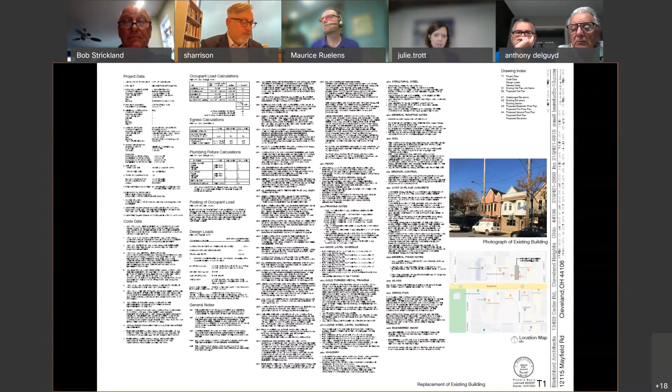Is there anyone else here to speak on behalf of the project? Okay. Well, since we're having trouble connecting the applicant for case one, I cannot see him up on the screen. If you are okay with us moving on to our second case until we can troubleshoot what's going on with your mics, we can come back to you as soon as we can get everything working. Is everyone okay with that? Mr. Logston, I can see you on the screen now.

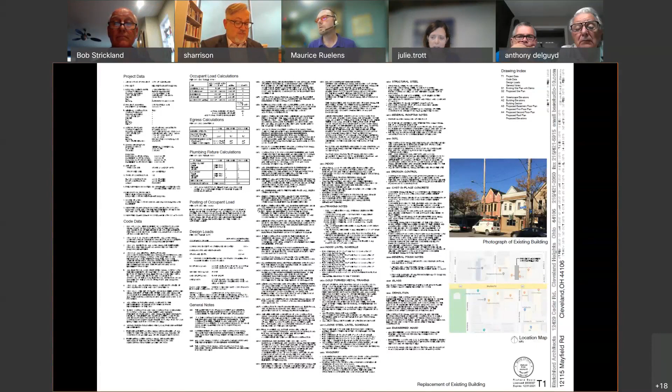We'll move on to the second applicant and we'll come back to you once we can get the mic situation fixed. We'll move on to our second applicant, located at 12002 Mayfield Road, the installation of Rocky Colavito sculpture.

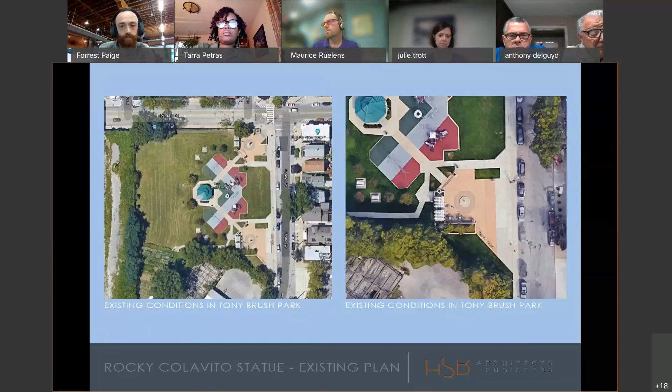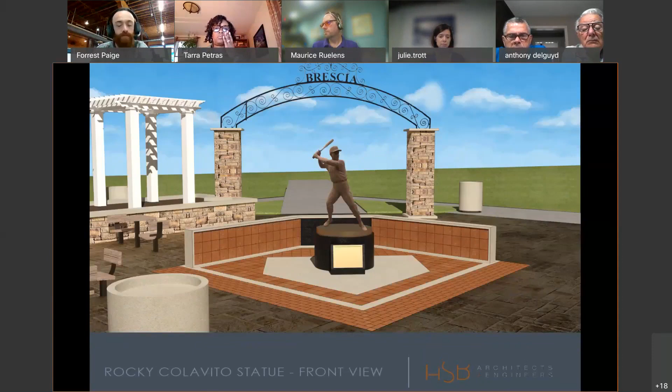Here's just a couple other views of that area, and here you can see what our proposed orientation would look like. The inspiration for the layout is a baseball diamond, with home plate being the central concrete piece where the statue sits on top. You can see how it sits in that same octagonal area that exists right now.

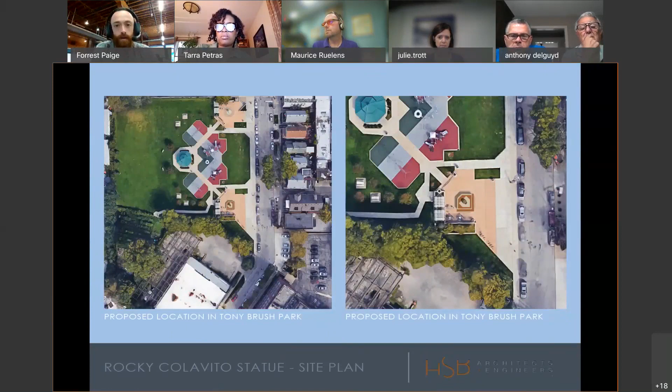Here's a more final rendition of what it would look like sitting in the park. You can see the low sitting wall behind it. Those black marble pieces right behind the statue are plaques for larger donors, and all of the other bricks surrounding the base and in the wall would be for donors contributing to the project.

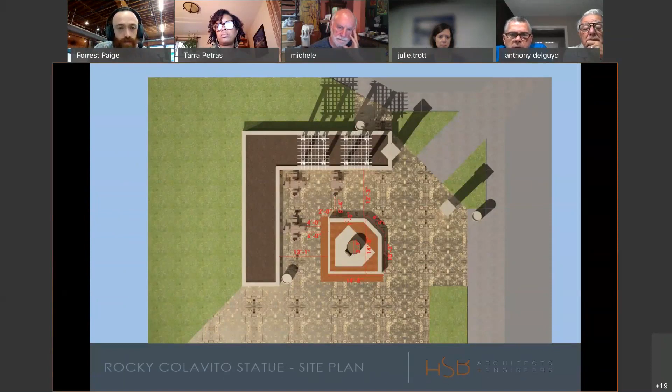Here's another view so you can see how the statue is elevated on that platform, two feet high, with a plaque set into the front that has information about Rocky Colavito for people to read as they're admiring the statue. Here's another view, and here are some dimensions showing clearances between existing benches and everything, so it's nice and easy to move around the statue and the wall without impeding movement throughout that public square area.

And here you can see the wall itself is the same height as the existing wall surrounding that planter bed back there, so it's very community friendly—you can sit on it. It's not obstructing the view of the park because it's all the same height, so it just matches the same aesthetics already in the park.

And yeah, that's a final view of kind of a superimposition of what it would look like seated in the park as it is now.

If Mr. Gamatees, you'd want to expand on anything else that I might have missed? Well, the objection that the committee had, the Little Italy Development Committee, was the color of the bricks. They want the red pavers for the basic floor foundation, but the wall bricks they want more compatible to the other wall behind it. I have contacted the fundraiser brick company.

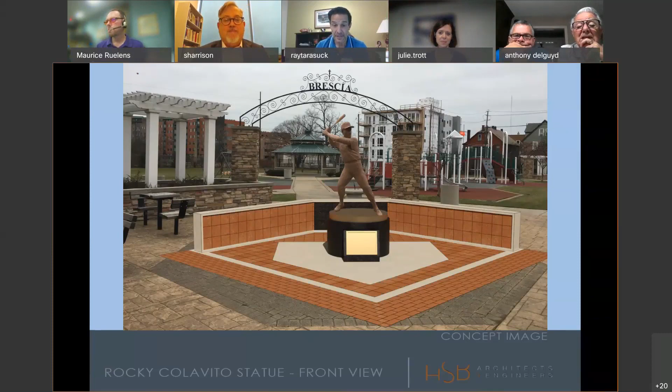I have a comment to make, not about the project itself, but it's going to sound silly, but the bricks and the donations for the bricks themselves. Years ago, when the Indians did Heritage Park, they did the same type of campaign on the donation for the bricks. And one of the really neat things that they did, I would suggest, and I don't know if you have plans for this or not, but as a suggestion, one of the neat things that they did was in donating for a brick there in the park, they also gave the person making the donation the opportunity to receive one of those particular bricks as a souvenir, as a memento, and the opportunity to purchase additional ones.

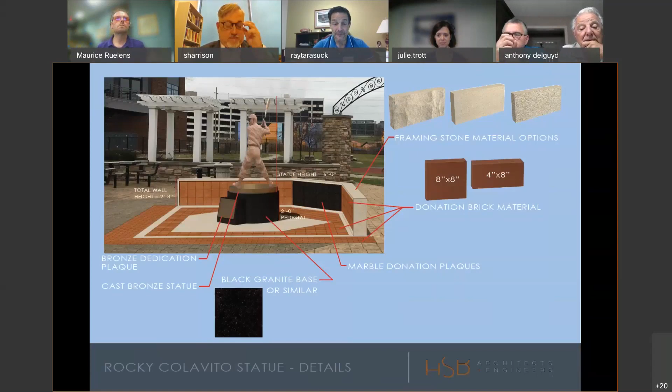And we did that with our family. We have a family brick that's there. Got a couple additional extra ones that have been a really kind of cool souvenir, baseball legacy that's been able to pass down to my nephews, that when they were little, they went and saw their name on their brick at that wall, and they were able to have one exactly the same at home to connect it. It's just kind of a cool souvenir type legacy that we've been able to pass down from my dad to those boys. So as a suggestion, I would make that suggestion to consider whoever does donate, that they might be able to receive a replica to keep in their home or pass down as a souvenir. So that's my only comment. But I think it's a terrific project.

Well, these bricks that are donated are there for perpetuity. And that's the whole point. My family's going to have several bricks and plaques because I come from a large family, and they're all waiting to come down and see it. And I think that's one of the points. And you have a good point as far as a memento thing, but this is a fundraiser thing, and that's going to add to the expense of the project.

I will take that into consideration to see how much donations we get. I think part of the problem was that everything's already priced out, and we didn't include anything like that. I mean, it's a great idea. Having known about it in the beginning, maybe that's something we could have thrown in there for another $20 or $30. But it's priced out. It's not priced for that.

Now, at the end of the day, if we get a ton of donations, maybe anonymous donations or whatever the case may be, maybe that's something we can introduce. Well, we also have structured into the project that anything over and above the cost of this project is going to go into a scholarship fund under Rocky Colavito's name. Now, if there's a lot of money left over, that's a good thing.

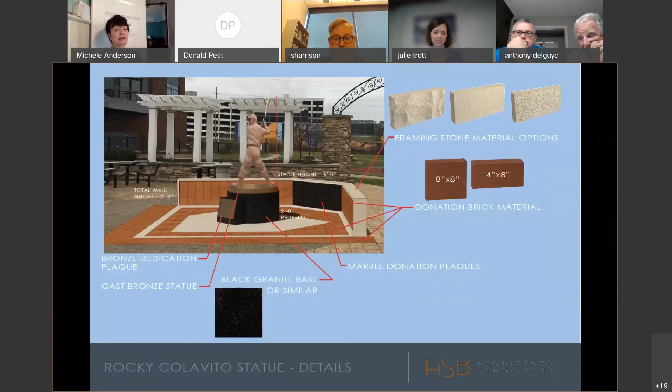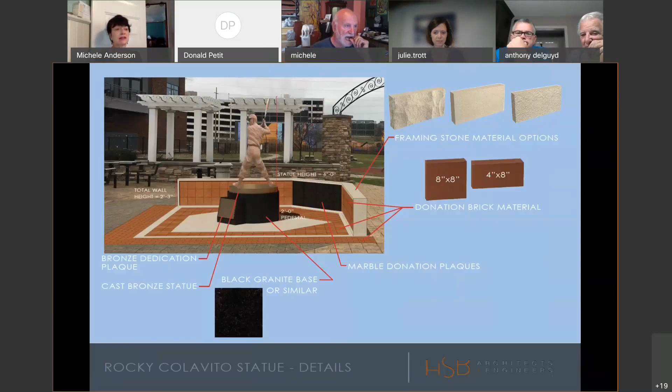Ms. Anderson, yes. Ms. Bailey, yes. Mr. Kalikia, yes. Mr. Collier. Mr. Dryer, yes. Mr. Harrison, yes. Mr. Strickland, yes. Mr. Tarasek, yes. Ms. Trott, yes. The motion passes unanimously.

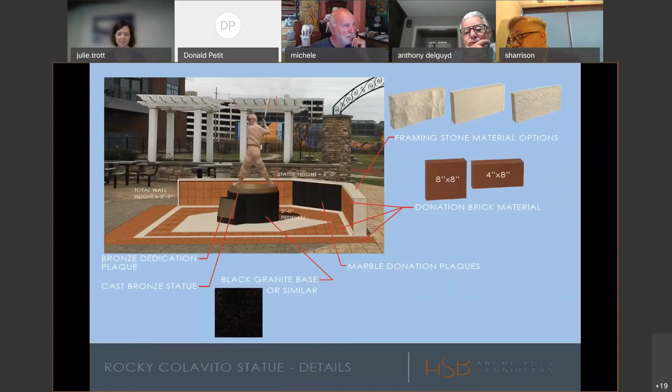Excellent, well, we look forward to seeing your project constructed. When's the timeline to do the installation? Sometime in the spring, we're going to have Rocky come in and have a dedication, hopefully opening day. That would be great, but I don't want to pinpoint exact date. Well, excellent, good luck.

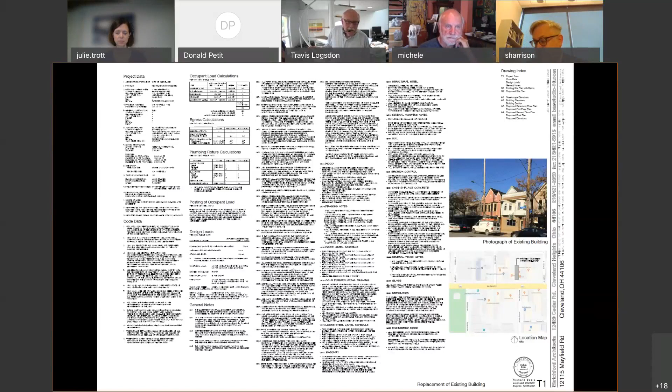The folks that visited with us about a week or so ago had an opportunity to walk through and see the condition of the building. Unfortunately, there really isn't a great opportunity to try and save the building because it's in really bad shape. So his initial goal was he had spent enough time looking at the building and felt that he really needed to replace it, because his desire as a new program is to have another restaurant in this location with a party room above. So that's his main goal right now.

And he's done really well. He has a similar setup at Maxi right now with the restaurant on the first floor and a party room up above. And he's always booked for events and feels that there's an opportunity to make a good go at this same kind of situation. It would be a slightly different restaurant, it wouldn't be the same kind of foods and stuff.

On T1 here, you can see that's the existing building that's there, which will be removed. Now, we did talk about the possibility of saving some of the tin ceiling in the front area only. There's an old original tin ceiling. We don't know what kind of condition it will be in as we remove it, but the possibility is there of taking that down and possibly using it over the new bar or even in the two restroom spaces on the first floor.

So we're going to have to very carefully take the building apart, almost like dismantling it, and protect the two other buildings on the side, and take everything out the back.

So there's an alleyway that is accessible to all of the stores along this side and restaurants, and then there's a parking area. So we have some flexibility of getting trucks and stuff in there to pull things out and then take them away. But it will be a slow, careful process, so we don't do any damage to anyone.

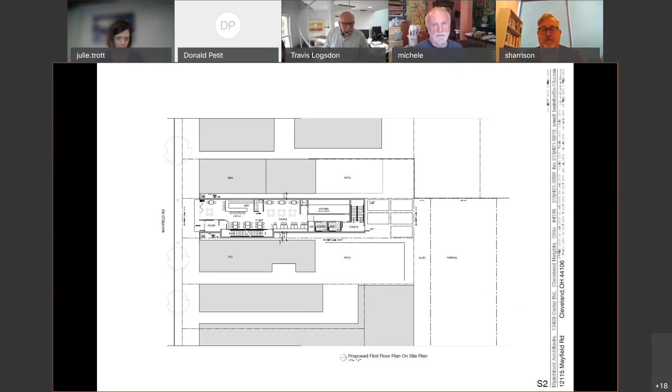And you come in, there's a small dining area, a bar, and then a couple of different dining clusters, we'll call them. The two restrooms are in the back. There's a janitor's closet, and the kitchen, which is a little bit larger than the one at Maxi right now. There's a stairway along the side, and then there's also a stairway at the back.

We need two exits for both the second floor and for exiting from the basement. In the basement, there will be a prep room, a small office, and then the food storage and all that down there.

So the brick we're working with is similar to the brick on the high school. We looked around the neighborhood, and there seems to be more red brick, reddish brick, or red tan brick options. We initially did not have a brick option when we went through the Little Italy review board. Actually, when we went through talking with Ray, he suggested that we bring a brick character into the building. So we did. We've been through the Little Italy review process and have been approved.

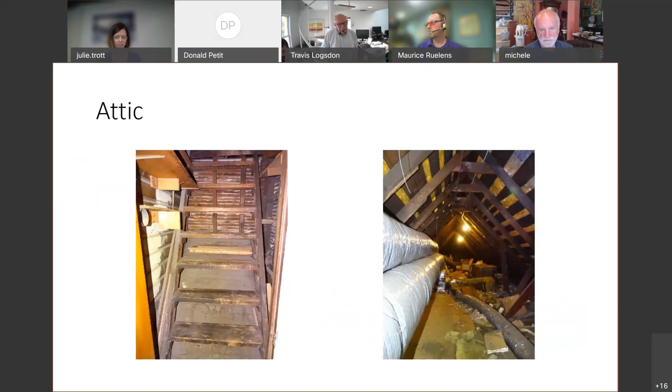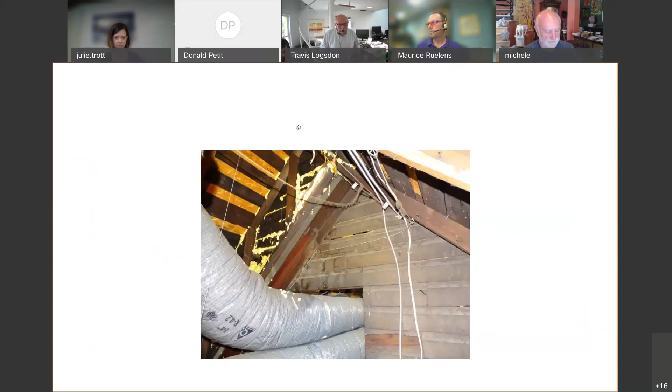And what was the general feeling from the staff related to the building? That it was in poor condition, good condition? It's in poor condition. There's water infiltration, quite a bit of damage, there's flooding or water in the basement. Roof is leaking. It is leaning quite a bit.

It's lost a lot of its character, although it's been more than 50 years since the changes, it doesn't have its original character. I don't know how viable of a fix this would be because there is some sagging in the ceilings in different areas as well. I know Mr. Harrison was there, he could probably speak a little bit to this. And Don, you were also there if you want to put in your notes on this.

Well, it's definitely leaning. There's a real pitch to the floors on the upper stories. In the alley between, posts have been added to prop up the second floor that's leaning there. It's really close to the neighboring building to the east. It's really tough to make a case for restoring this building. I don't think it's architecturally significant. It's been altered. It does contribute to the streetscape, but it seems like the conditions really belie a restoration in this case.

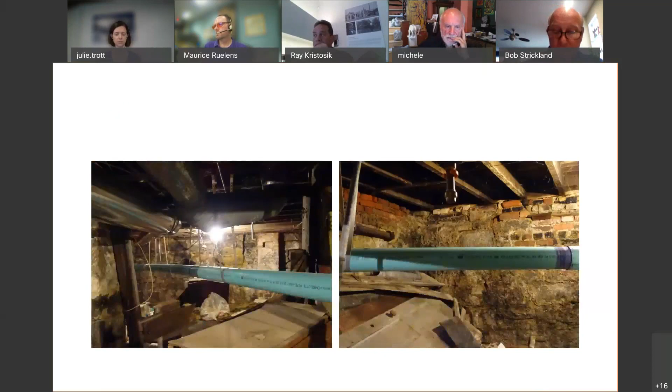Other questions or comments? Madam Chair, we have Mr. Harrison. Go ahead, Mr. Harrison.

You're muted, sir. I'm so sorry. I would echo Commissioner Strickland's comments and his question to Giancarlo - is there a repository that could take these stones, assuming they're in good condition?

Can you hear me? We can now. Okay.

Sandstone, when exposed to moisture for a long period of time - and these foundations are typical of Cleveland - it actually gets very, very soft and sandy. It begins to fall apart. So I'm not sure, I think these are limestone, though. I think these are limestone. Sandstone - this is sandstone. I'm pretty sure it's sandstone. Okay.

Which is sandstone. Even the bridges that we have are sandstone. The largest quarries in the world are right here in Ohio, so it's a very common material historically in Cleveland. But these basements have been exposed to moisture for such a long time, so it would be interesting for a wall or maybe landscaping, but I'm not sure it would be something worth saving, really.

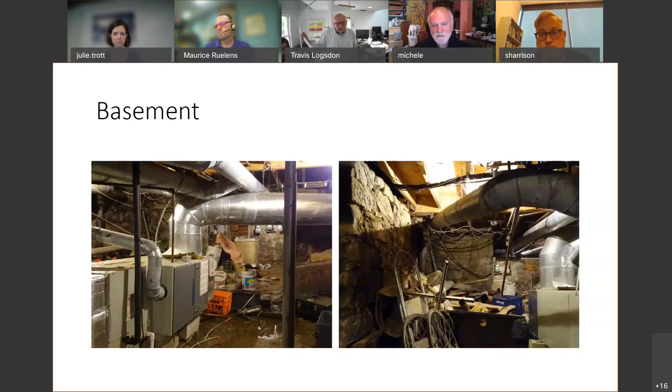Thank you, Giancarlo, for that input. It just looks like such historical stone that I thought maybe there was a convenient repository for reuse of stone of that nature. But if it breaks down over time due to exposure to moisture, then I understand your point.

I believe Mr. Watson had his hand raised next.

This is Rich. We truthfully did not discuss the saving of the stone. I can bring it up with the owner. From his viewpoint, everything that's there except for those few items. There's also a barber pole on the front that will be retained and used somehow, because his wife previously had the La Barberia hair salon there, which has been closed for a while. I think I'll talk to him, but I don't think there was a lot of conversation, frankly, about the saving of the stone, but we can certainly discuss it.

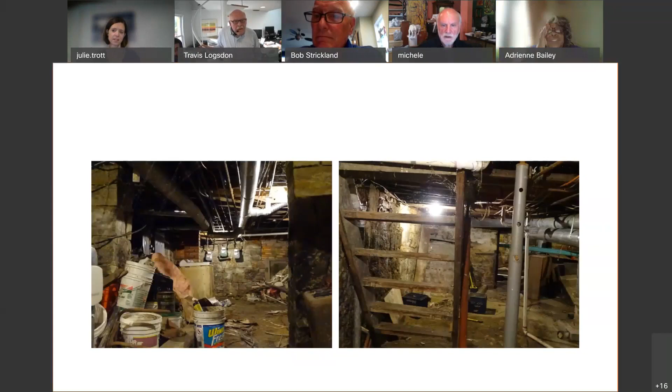Ms. Bailey? Yes, I just have a question for the architect regarding the foundation. I see some bricks in there. Is the actual foundation built with brick and then the stone is just put on the wall as a finish? Do you know that? No, we believe it's stone. There's some brick infill that's been used over time, but the main foundation is stone. It's stone. Okay, all right.

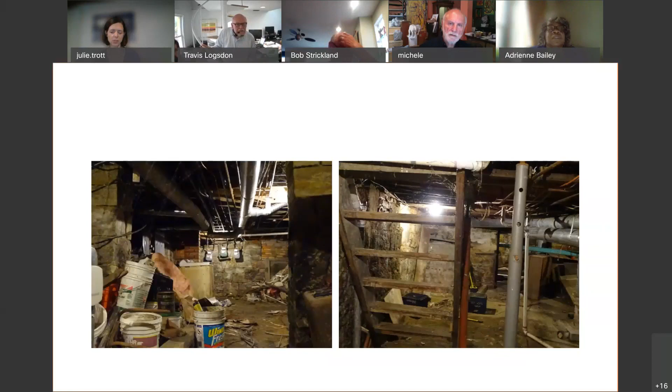My question for logistics here: are we looking at this as a final review for both the demolition and the new proposal, or just the demolition at this time, since this is the first time we're seeing this project?

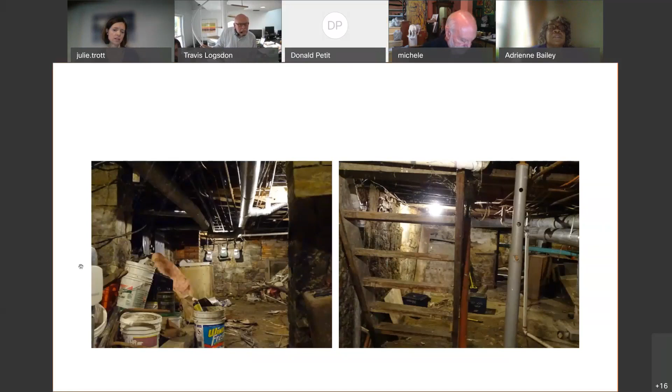Yeah, Madam Chair, this is on the agenda for final action for the demolition and the new construction, but that's always at the discretion of the commission. We felt that because the design review committee had taken this through a process already and approved it, that it could be approved for final action. But if there are outstanding items that you're not seeing or other issues, then I think we always have the option of tabling the new construction.

Okay, perfect. Thank you for clarifying that.

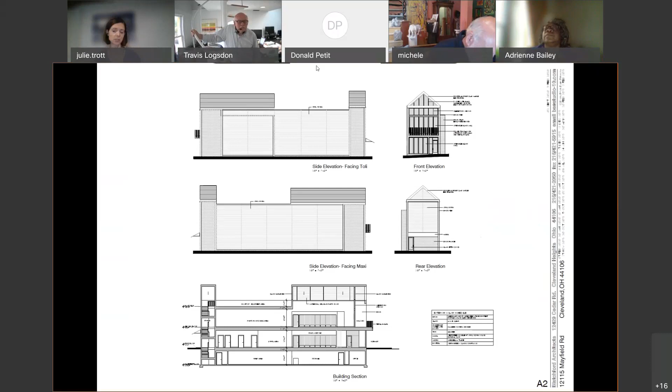Other questions or comments from commission members? Madam Chair, we have Ms. Anderson with her hand raised. Go ahead, Ms. Anderson.

I agree with the demolition. This building does seem to be structurally compromised, and I think it would be just not feasible to try to right the leaning and try to make it usable as it is.

My concern about the building that's going to be replacing it is that it looks like the vast majority of the facade is glass. I can understand that the owner wants as much natural light as possible. It's just that it is so inconsistent with the other structures on the street. The structures on the street have a nice rhythm and pattern to them, not only in size and scale, but in openings as well. I think the original designer probably had this same concern about natural light, and that's probably why they introduced the bay windows. So that's my concern, that I just wanted to bring up.

Okay, thank you. Ms. Bailey? Can we make comment on the new construction now, or are we just still talking about the demolition? No, go ahead. I think we're talking about both.

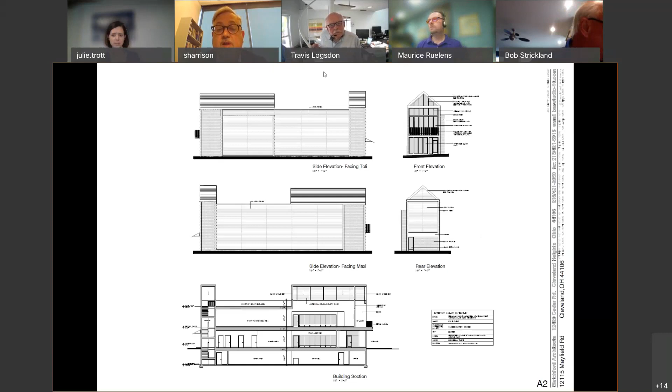Yes, just to quickly answer your question, I've been quite vocal all along about the height. If you lowered it to the level of the two buildings on either side, especially the one to the west, I would support that. I personally don't think the glazing in the tympanum of that gable is necessary or even attractive. But for me, as Chairman Trott said, the height is unfortunately messing with the proportion of the building and the pitch.

And so visually, I think if you lowered it, you'd have a more successful design. So I'm hoping we can vote on the demolition while I'm still here, but I'll have to leave shortly.

So what I'm hearing, though it wasn't exactly said, is that in general we support the direction you are taking it, with the feedback of the height and wanting to see a little bit more detail on materiality and its exact locations. You're trying your best to present it through the screen, but having a close-up of the building with the materials called out so we could understand the railings and colors and so forth would allow us to get to a final approval very quickly.

Okay. So is there other feedback from the commission that is in contradiction of that? Or do you think we could put forward at least a demolition or the tabling of the new concept?

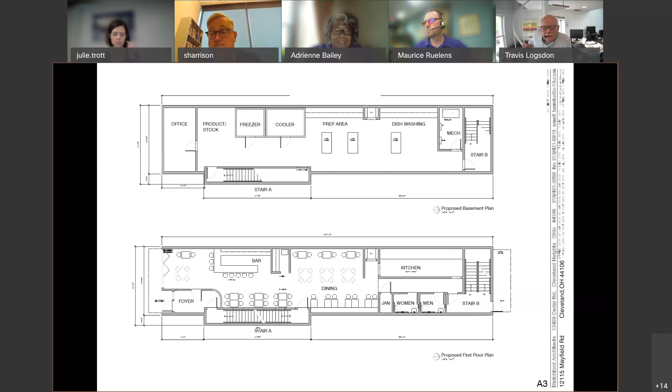Okay, that's the stairs. If you look at that, it's the stairs popping out, so you're seeing the front portion of that. Okay, so that's the stairs. Okay. Yes. All right, go ahead.

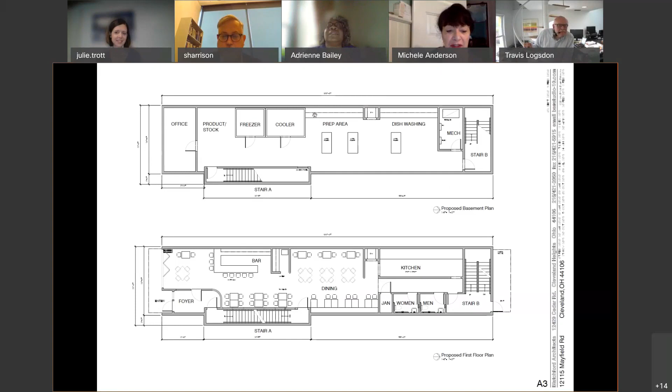Ms. Anderson, did you have? Oh, you just muted yourself. I just wanted to say that I agree with Mr. Strickland, and the drawing of the actual building, at least on my computer screen, is maybe an inch tall, and it's really hard to discern what exactly is being proposed here. I think we need just a full elevation drawing, with the materials, so we get a better handle on what is going to be built.

So, basically echoing what was said before, I think everyone is in support of the demolition. We have a few different ways to move forward on this. We could move forward with voting on the demolition only and tabling the concepts to allow them to come back, or review the new proposal for concept only and not vote on that, which would then allow them to come back for the new concepts for final approval in the near future. Or we can review and vote on the two together.

I guess I've heard fairly loudly that we'd like to review the proposal as a concept only, to give you the opportunity to address some of our feedback, but it's really up to you as the applicant whether to agree with that recommendation or ask us to vote on both. If you're willing to vote on both, you have good comments, and we're obviously willing to work with them to come to a resolution you're comfortable with. So it'd be good to get as much feedback on the votes as possible. You do take the risk of not getting approved. I see what you're saying. Okay, where if we probably don't want that.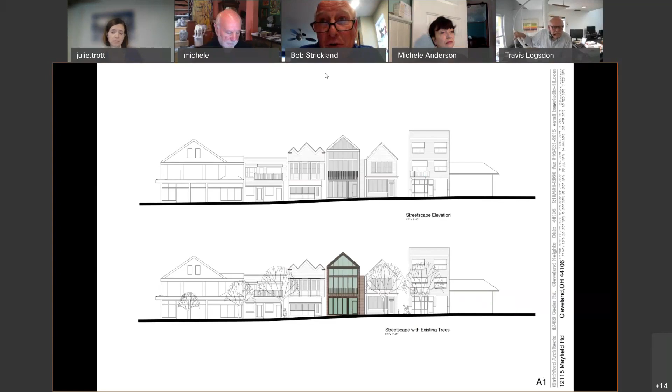This is Bob Strickland. Madam Chair, I'll propose approval of the demolition of this structure as proposed, with the salvage of the tin ceiling in the interior and consideration of review and salvage of some of the stone elements in the foundation that might be appropriate for reuse, and to table the approval of the final design.

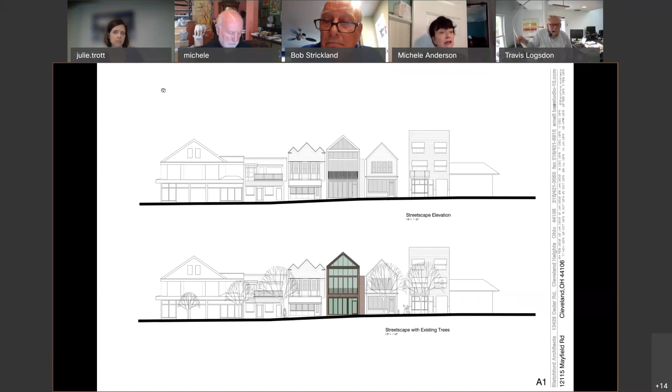We have a motion with conditions. Do we have a second? I'll second it, but to salvage at least the mantles, a mantle or more on the second floor. Yes, I think all historic material should be reviewed for salvage. Amend my motion to include that.

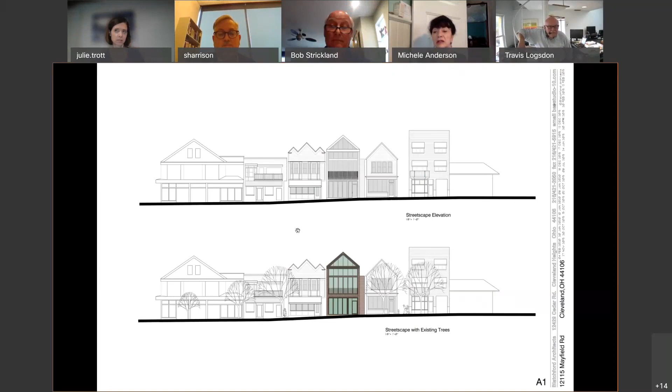So we have a motion, we have a second. Any further discussion? Mr. Secretary, please call roll and announce the results.

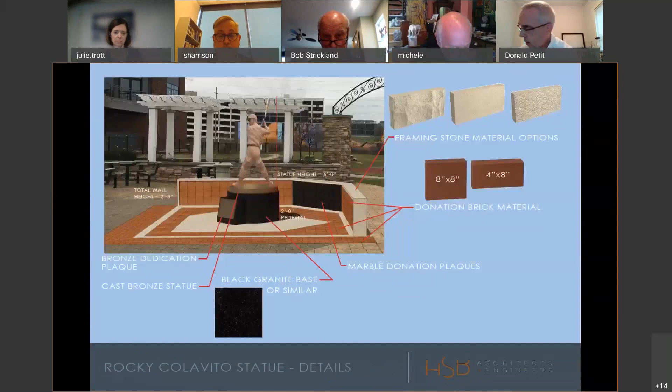Ms. Anderson. Ms. Bailey, yes. Mr. Kalikia, yes. Mr. Dreyer, yes. Mr. Harrison, yes. Mr. Strickland, yes. Mr. Tarasuck, yes. Ms. Trott, yes. The motion passes unanimously. Excellent.

So hopefully you've received enough feedback related to the new proposal and its design, and we look forward to you coming back here in the near future with some revisions and/or a blow up that we can see and understand the materials a little bit better. Great, thank you for your input. Thank you.

We'll now move on to our third applicant, which is located at 4427 Rocky River Drive. Cemetery wall fencing and signage upgrades, I'm assuming, at St. Patrick's of West Park Church.

Yes, hi, this is Jim Schilens speaking. The proposal is for a fence and columns to protect the cemetery at the church. There currently is a black chain link fence approximately 3 feet high, and it is not deterring vandalism and damage to the cemetery. Consequently, the church has asked us to develop a plan of a higher fence, something that would look appropriate, similarly black in color, an aluminum fence with columns.

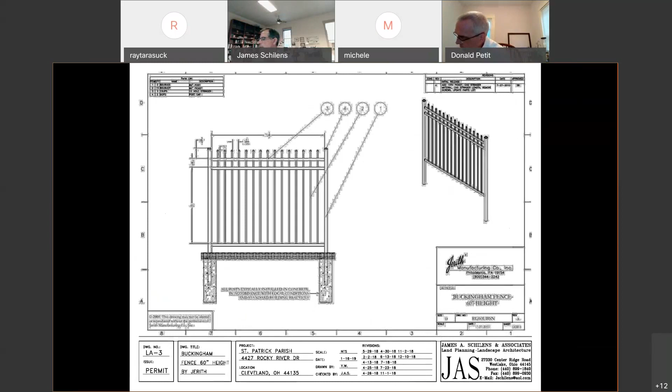So the area between the cemetery and the church is going to be demolished, removed, and then new piping put in for the downspouts and drains. New curb at the cemetery to keep the water in the cemetery separate from what drains onto the sidewalk, and then new curbing surrounding to allow them better maintenance of the edges of the cemetery. There currently is a large tree on the northeast corner, and that tree is going to be protected during construction with fencing and maintained. They would like to keep it.

And that's about it, we'd like approval. Oh, the columns would be a masonry column, but faced with a sandstone facade, natural sandstone, to match the church.

Excellent, thank you for the presentation. Is there anyone else here to speak on behalf of the project? I believe the councilman may be present.

Thank you, Madam Chair. I'm here just to express my full support for this project and thank all of you for your consideration. This is obviously a landmark corner in the neighborhood, and it's exciting to see this proposal for that corner to be made just as pretty as the church behind it is.

Excellent, thank you. Do we have feedback from the local committee? Yes, Madam Chair. This was reviewed by the Far West Design Review Committee. They approved it as presented. Their only condition was saving that tree in the northeast corner, possibly by not installing one of the pillars near the corner, but their only concern was with the retention of that tree.

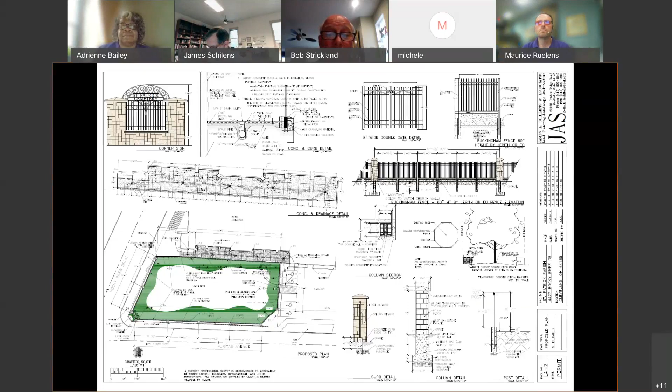I think we have a motion. Do we have a second? This is Allan, I'll second. Thank you, so we have a second. Any further discussion? No one with their hands raised. Thank you, Mr. Petit, please call roll and announce the results.

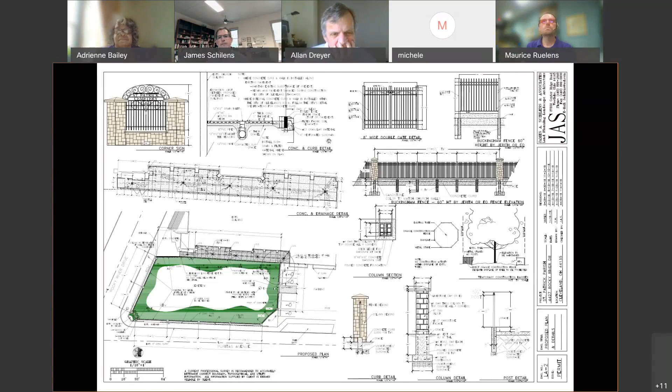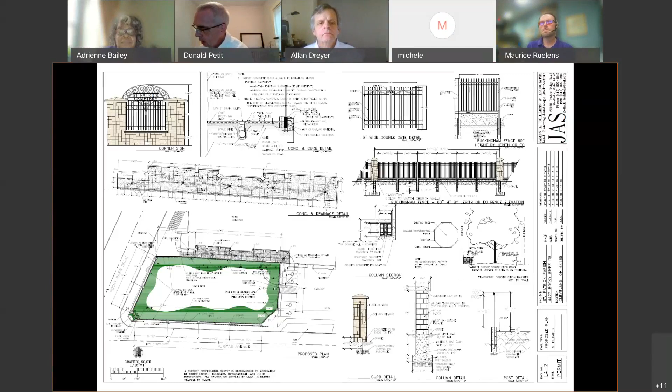Miss Anderson, yes. Miss Bailey, yes. Mr. Kalikia, yes. Mr. Dreyer, yes. Mr. Harrison had to step away, doesn't seem like he's back yet. Mr. Strickland, yes. Mr. Tarasuck, yes. Ms. Trott, yes. The motion passes unanimously. Thank you all, thank you.

That concludes our certificate of appropriateness. We'll move on to reports. We do have nominations to the National Register of Historic Places. I'll hand it over to staff to make the presentation.

Thank you, Madam Chair. We have two nominations before the State Preservation Board next week. As a certified local government, we have the opportunity to comment on these proposals. The first one is really our project, we were sponsors of the grant application, a certified local government grant to fund the study and the nomination.

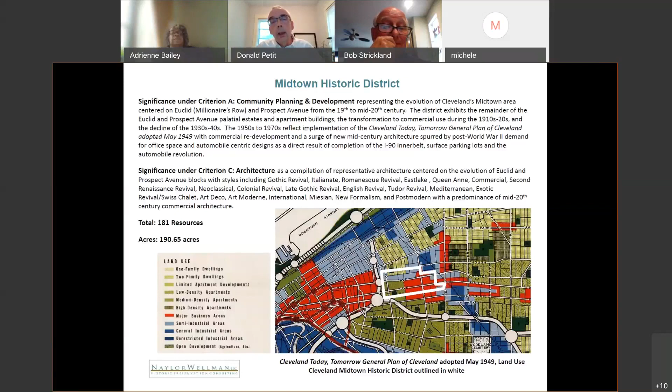You can see it's being nominated both for its architecture and for its importance in the broad patterns of our history. The image on the map is a copy of the 1949 General Plan of Cleveland that included the development of the Inner Belt, and you can see the proposed district overlaid there. Clearly a lot of the buildings and construction in the neighborhood was a direct result of the plan and the creation of the Inner Belt.

Before I talk about that, I just want to point out that the district really covers the history from Millionaires Row through the commercial development of Euclid in the 1920s, a lot of automobile related development. It's also significant for its mid-century modern collection of international style buildings that were a direct result of the planning and development of the Inner Belt.

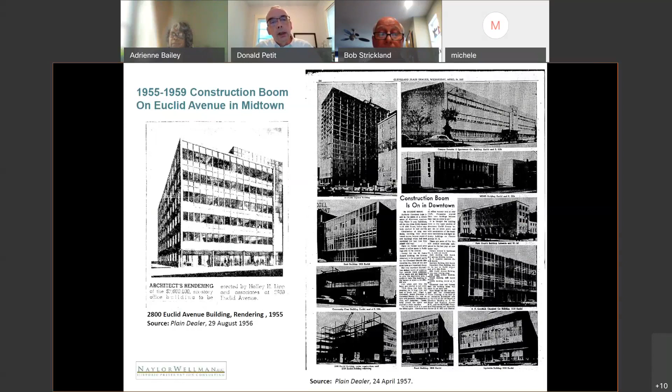You can see some of the buildings from the 1950s building boom here, and the next slide shows a few others, including 3101 Euclid Avenue, which we listed as a Cleveland landmark individually a couple of years ago.

So we think it's a nomination that's going to bring a lot of potential redevelopment to the area. It will make properties eligible for the state historic preservation tax credits, so we think it's a great project. It won't negatively impact anyone already in the neighborhood in terms of building permits. It's strictly a National Register designation intended to provide incentives for future development.

So I guess I did send the entire nomination to the commission. If you have any comments or would like to make a motion or a recommendation to the state board, that would be appropriate now.

Feedback from the commission. Does this include the church at the corner of, I don't know the name of the church, but it's the sandstone one at the corner of Euclid and 30th, I think? That's on sale. It does. That church is actually already, I believe, individually listed on the National Register. It's already part of the local Cleveland Landmark District, but that would be part of the National Register District.

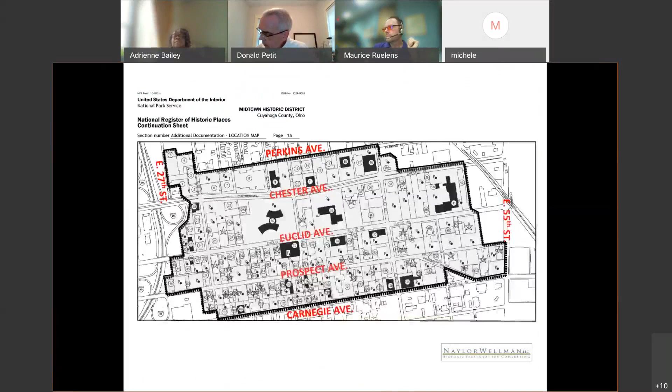Other questions or comments? We have nobody with their hands raised. Knowing this area very well, working here for the last 17 years, it's a really eclectic district, but fairly intact, so I think this is a great nomination. Madam Chair, Ms. Anderson has her hand raised. Go ahead, Ms. Anderson. Just want to commend the staff for their hard work on this project. I think this is a wonderful addition to our historic community. So thank you very much.

My only comment would be that with this nomination, in addition to the review of Landmarks Commission, and the expansion of what the Landmarks Commission will now be reviewing, I do think we need to continue to support increasing staff to give these districts the attention they need, knowing that the building number continues to grow, but our staff number is still very modest.

So with that, do we have other questions or comments, or would someone like to make a recommendation for nomination? I move approval for the Midtown Historic District nomination. Do we have a second of recommendation? I second that.

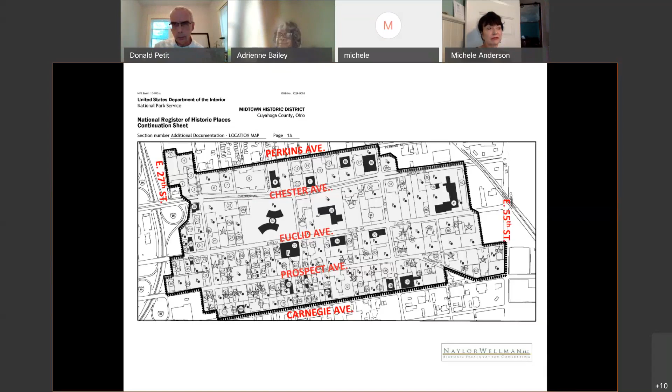Any further discussion? Mr. Petit, why don't you call roll and announce the results? Ms. Anderson? Yes. Ms. Bailey? Yes. Mr. Kalikia? Yes. Mr. Dreyer? Yes. Mr. Harrison? Mr. Strickland? Yes. Mr. Tarasuck? Yes. And Ms. Trott? Yes. The motion passes unanimously. And staff appreciates all the comments and support.

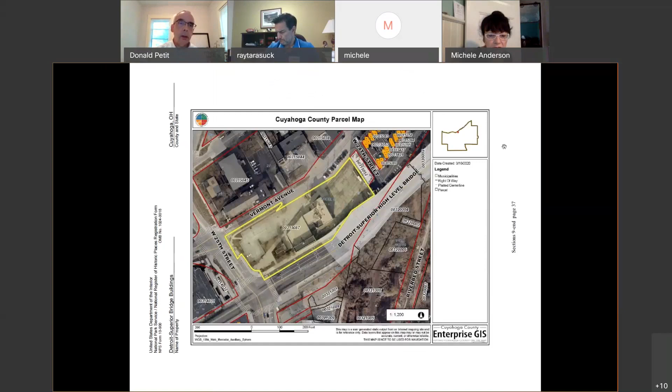We'll move on to our second nomination, the Detroit Superior Bridge buildings. This nomination actually includes 3 separate buildings, all associated with the Detroit Superior Bridge. If you go to the next slide, Carl, it shows you the context. You can see the bridge on the right and West 25th Street to the west. The next slide will show you the exact footprints of the buildings. There are 3 buildings here.

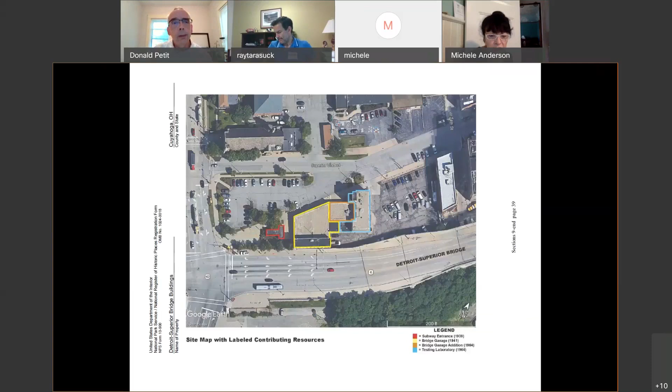One is the subway entrance to the bridge, which was built in 1939. The second building is the county maintenance garage, built in 1941 and expanded in 1964, as well as the county testing lab, also built in 1964. The nomination is not based on the architecture; it's based on the broad patterns of our history, and in this case, Cleveland's transportation history. There's clearly a strong association here with the Detroit Superior Bridge, which is already listed on the National Register.

Again, you've all received the entire nomination and the photographs, and we're here today just to ask for comments and a recommendation to the state board. Thank you. Questions or comments from the commission?